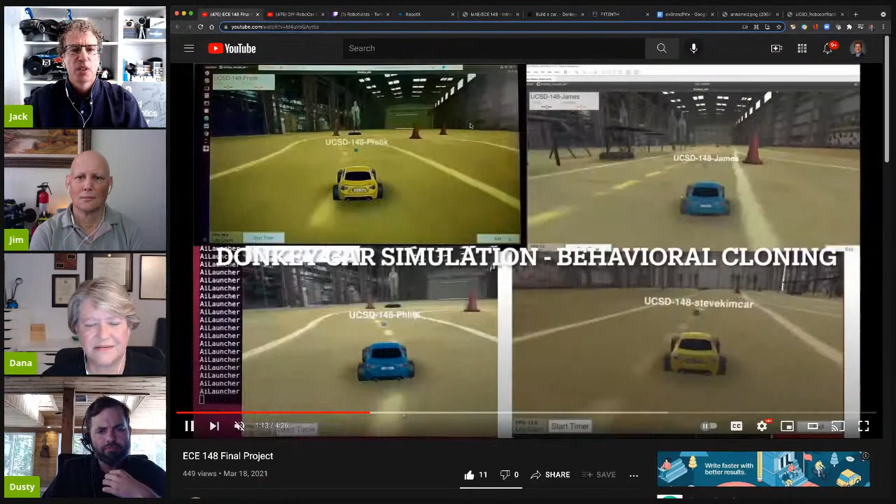This is actually people running a competition online. Basically, we have some NVIDIA GPUs, and that allows people from all around the world to actually come compete.

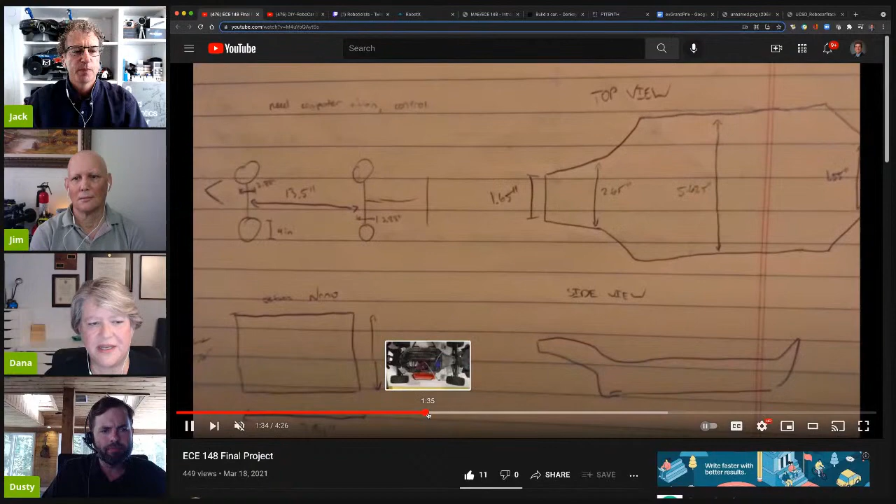So they're competing in simulation here then, right? They were, yeah. In this case, everybody could be anywhere around the world, and I have a server at my home office - think about it like a multiplayer video game.

So they're each individually going around the track, and then you're comparing some kind of statistics on how they did to decide the winner. Yeah, so basically you have the timing.

So let me get back. Each of those, for example, this is real time, and they have the screen, and we have a lap counter, and each of those has a time, and later on we select the top 8 to go to the finals. But yeah, so they compete individually.

That's the whole point - now you can't say, hey, I'm a mechanical or software person, not going to do software. Well, you have to do it in the beginning, right? Because we all know we have to work together in teams and communicate once out of school. And if you only know mechanical engineering, or only electrical, or only software, you won't be able to be an effective team player.

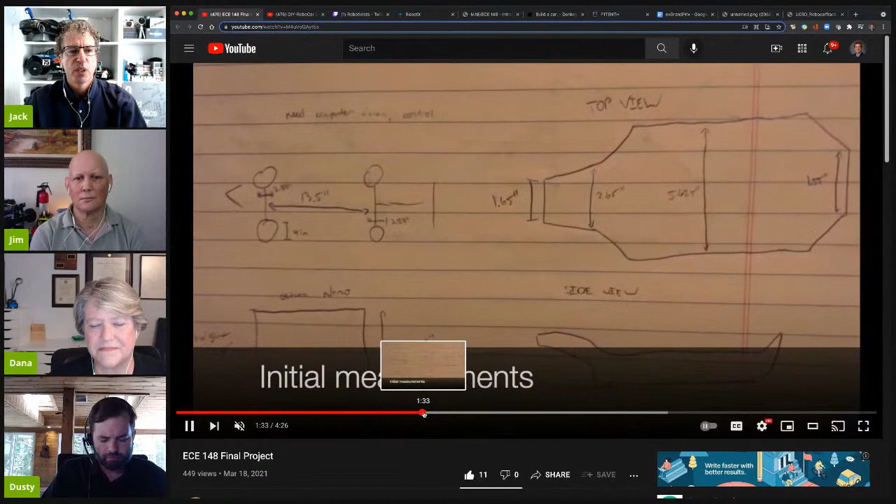So we give everybody a chance to contribute a little bit, and then later on you can specialize. This was actually before the other video where they received just the chassis - they have to develop from the ground up. They just received the parts.

This is lucky enough to have several resources at the University of California, San Diego. We have 2 or 3 tracks around. This is an outside classroom.

Nice track. Yeah, so is that using behavior cloning? I've seen that a couple times in your video. It is using behavior cloning. This is a track, actually, if you think about it.

This is from when the pandemic hit, and for one quarter we couldn't teach, but the very next quarter these tents were up, and faculty who wanted to teach in person were allowed to. So that's still considered an outside-inside hybrid environment, and we had to follow the usual COVID-19 precautions. But yeah, that's an awesome track.

And then this is the other outside track that we have. As you can see, some shade, some sun, and that change adds a whole other level of difficulty and challenge for the students.

Yeah. Plus the track itself is physically going to feel different, right? To the wheels, the traction. It does, good question. As you can imagine, the traction here is completely different than what we have on artificial turf, and the students have to learn to deal with that.

And how'd that work out? Depends - in the beginning they have all these lessons learned. So what we've done here, things can go really quickly and now we're slipping or tipping over, and that's actually a good lesson learned. But what works in simulation doesn't necessarily work in the real world, so you keep tuning it, keep understanding, and you improve from that learning experience every time you go through it.

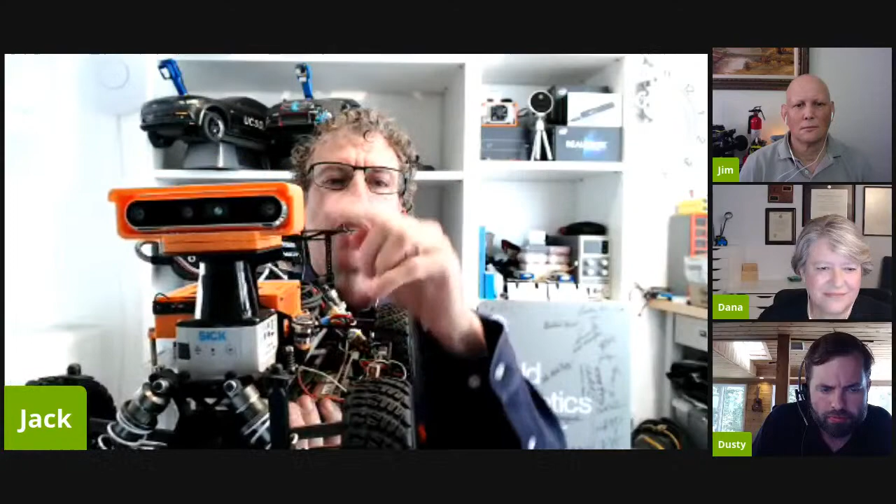When you get to the more sophisticated competition level at university, you may get a robot that's a bit more sophisticated. We use one based on the MIT car F1TENTH from UPenn and other universities, with a LiDAR in front and an RGB camera. We have a Jetson Xavier NX, significantly more powerful than the Jetson Nano, and this can do everything we've thrown at it - mixing neural nets with traditional computer vision, TensorFlow acceleration. It's a pretty nice machine, but significantly more expensive - a LiDAR of this type alone is probably $2,000.

You can see outdoors, see 20 meters out, and have a high refresh rate, even with less expensive options. But for the proof of principle, you don't need this - you can learn quite a bit with a less expensive piece of hardware.

This is our college level competition. That means someone has to sponsor you to get to one of these, unless you have some money to put in. But that helps us do quite a bit of development.

Does it basically boil down to the sensor package, more expensive sensors and computer board? Just think about it—the faster you go, the more you pay attention when you're driving, right? You have to be tuned, you have to see farther. And if you can close that loop fast enough... if not, by the time you've processed it, things already happened in the past, and you may not have enough time to react. So it depends on what you're running.

But in principle, the more you fuse sensors, the more reliable—no single sensor is going to give you everything you need. We all hear about computer vision versus LiDAR from the industry, the cars we see on the street now. Some people say I don't need a LiDAR. Others say if you don't have a LiDAR, you don't see the things you don't see. That's a discussion—what's your impression of that?

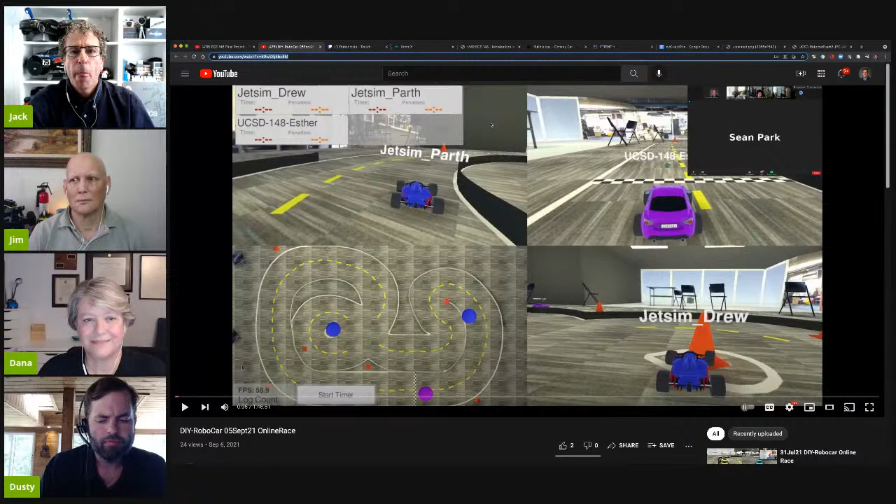So it depends on the simulators. We are definitely putting 4 cars racing at the same time. When you do the real world—I don't think I have a picture here—in Northern California, that's the do-it-yourself robocars, we do 2 at a time. At this competition, we're supposed to have 2 at a time, but nobody proved that we were safe enough, so we didn't. But next year we expect to have multiple agents. Kind of expensive when you have a $6,000 go-kart and they crash into each other. Yeah, and imagine now $1 million cars. That's the kind of development for those robots.

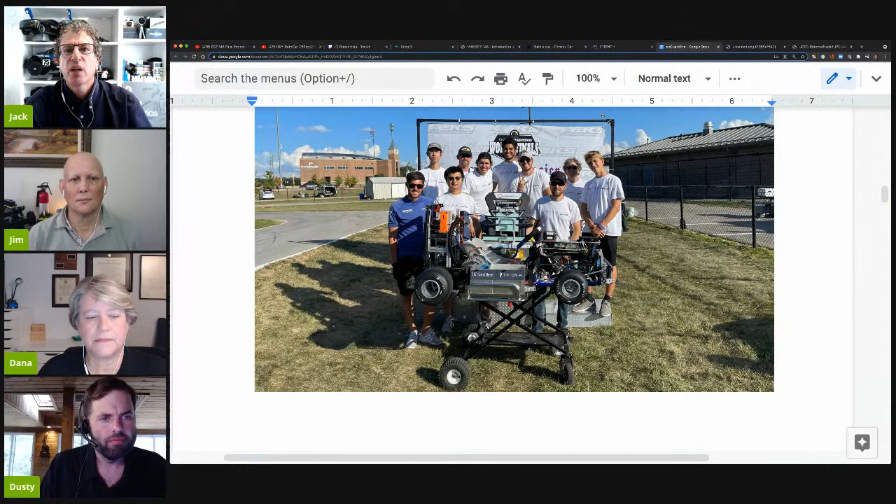Does the more expensive one require explicit collision detection and avoidance software, or is it just baked into the behavioral cloning that they do? Yeah. So the answer would be both.

If you're doing behavior cloning and you're trained to recognize another car and go around—I had a video showing going around cones. We basically put the cones around the track, and I forgot to mention we also added a random cone to go around. My next challenge will be to have a pace car, so we have two cars plus a pace car that keep changing from the left lane to the right lane every few seconds, and you have to go around without crashing.

Depending on what you're doing with behavior cloning, you have to get something very close to what you're trying to do, such as giving an advantage to the pace car, and you train passing it every time. The other option is programming it directly—you draw a bounding box around something that doesn't look like the track, determine if it's on the left or right side. If I pass from the left side, will I get off the track? And if I get off the track, do I lose that lap because I went around the cone on the wrong side, or should I wait for the next moment to pass? It's very similar to some racing rules.

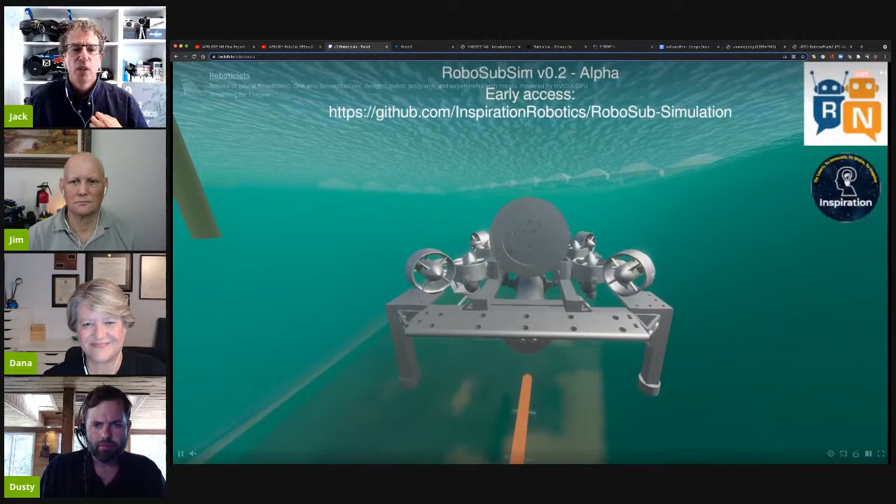If not, we have a competitive advantage, so we developed this simulator that's open source. This is the model for our sub, but the targets, everything is as realistic as we can make it. You can see the white tents here on top - that's exactly how you'll see that on the pool. We color the water as best as we can.

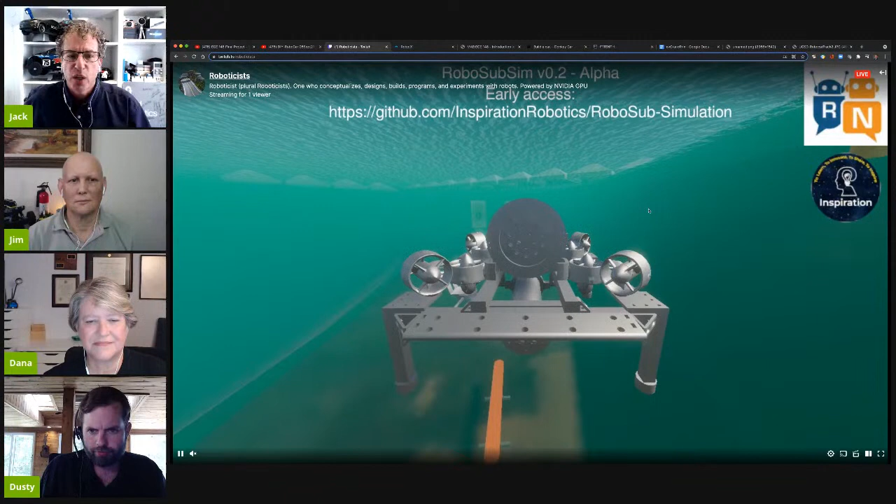I guess one of the questions is how realistic it is. This is our first shot, right? Our cameras.

Is this from Team Inspiration, Jack? It is, yeah. We had these guys on a couple episodes, and I forgot to point out that you are one of their advisors - they're just an amazing group of kids. This was all developed for high school students, right? Actually, one of the main developers for this is a high schooler - now he's at college, just got to college in France.

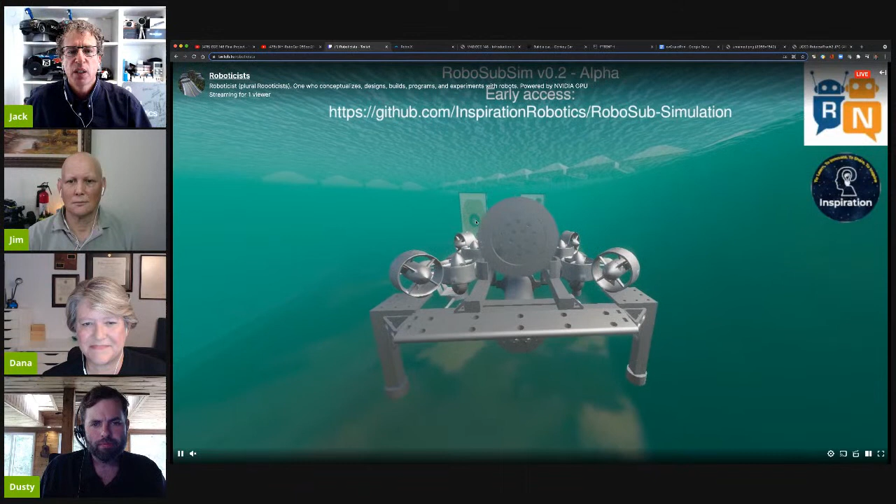So we work together with this. You can't see very far with cameras. Someone's asking, is it all computer vision? Not necessarily - underwater, you can't see really far. Then you have to do a lot of inertial navigation and get close, and then the cameras kick in. There are sonars and other sensors that we use.

Man, you must be just like a busy guy. And I don't think we pointed out, you have a day job as well at a biomedical company. I do - I work for probably one of the best

diabetes care companies in the world, and I'm not shy about talking about this. We develop sensors that go on the arm of folks and measure glucose, so you don't have to prick your finger anymore. I can tell you we are the number one company in the world now in terms of volume of sensors all around the world. So we're pretty happy when people tell us, hey, thank you, you changed the life of my kids or my family - it makes you feel good about it. Yeah, that's my day job.

So everything I've talked about so far here is my after-5-o'clock job. 5 p.m. I'm sure that's just a great feeling, and it's so awesome that you share all your experience with students and help create the next generation of roboticists out there. This has been really interesting.

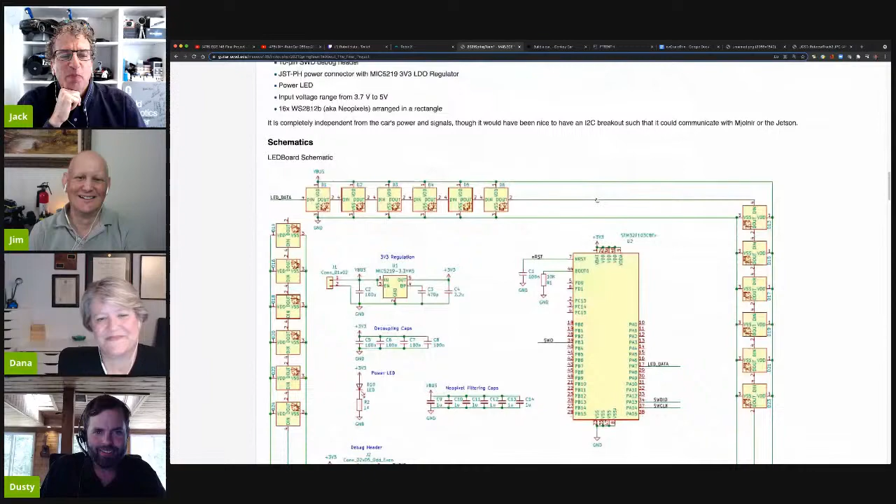Maybe a follow-up, you ask me how fast race cars are going compared to humans. We can have you again on in the future for sure - we'll see, even next year. We might go on the go-kart and get a lot of advantage because we have much more leverage on that. Then we talk about the race cars because I think we're far away - think about those professional race drivers, it's awesome, right?